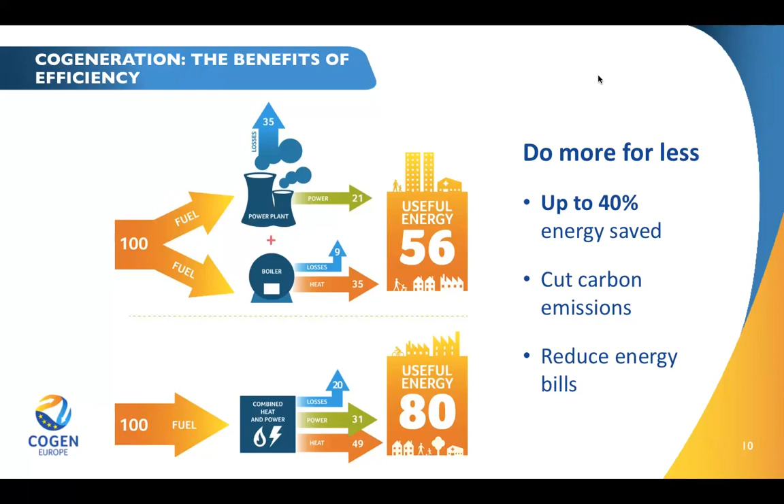So as it's being said, CHP cogeneration today is at the absolute core of the new system that we are aiming at, because it enables us to link both electricity and heat as well as gas markets. It definitely improves the overall system efficiency, making it possible to apply the energy first principle across the entire energy

chain. It enables us to minimize waste in all possible forms, being fossil fuels, which obviously will be progressively withdrawn from the new distributed, modern and digitalized system. And it will enable us to integrate such valuable resources as biomethane, hydrogen, and biomass, as well as boosting flexibility by supplying dispatchable power. It will lower the overall energy system costs and bring, above all, value to local level and local communities, new consumers, and potentially create new jobs locally.

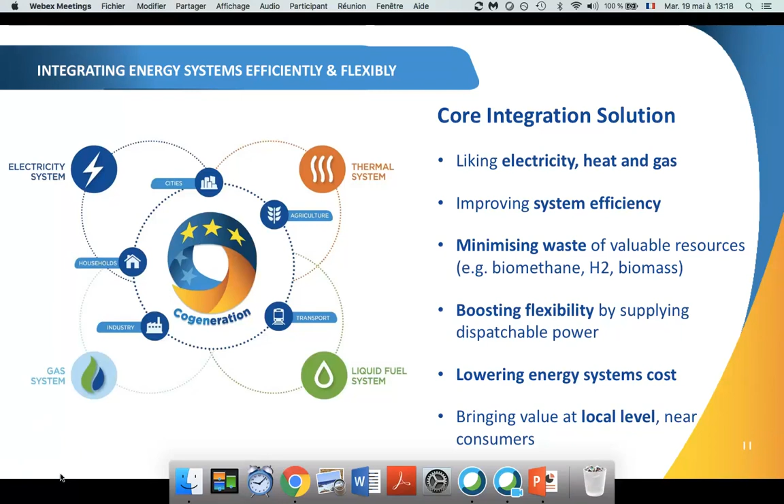Yes, so this is just a summary to show you how cogeneration can be part of the new system and why it should find its righteous place in the new context of the new sector strategy. And I will leave the floor to our two presenters to show how practically this can be achieved.

Thank you, Camilla. So now we're going to hear a few interesting stories to illustrate sectoral integration. The first will be the KIEL project. So I have Klaus Parhuber from INNIO Jenbacher, and he will give the first presentation.

I see you there, Klaus. Thank you very much, Hans. You can see my screen, yeah? Not yet. Not yet? There's always a slight lag. Now it should work. Yes. Thank you, Klaus. The floor is yours.

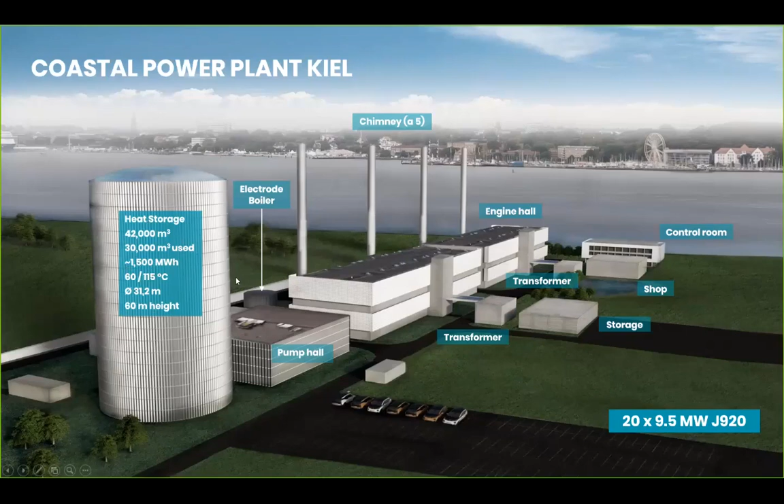This is a picture that was taken end of 2019, right at the time when the plant went into commercial operation. You see here the big heat storage that is just in front of the old coal plant that is here behind it. And on the next, on the left hand side, you see the old coal plant, which was built 50 years ago. It was built really for not flexible operation. Typically such coal power plants have been built for 1 start per year. They shut it down just for some maintenance. The coal plant was also a little bit bigger, about 300 megawatt electric output and about 300 megawatt heat output.

When running in combined heat and power, this plant had, of course, more than 50% total efficiency, but not achieving a fuel utilization and total efficiency of more than 90%, as the new plant is doing. As I said, the new plant is consisting of 20 gas engines, producing in total 190 megawatt electric output and about 192 megawatt thermal output. On this picture, you see the old coal plant here behind the new engine plant. And really the difference is the flexible operation of the new gas-fired engine plants, which can start up in 5 minutes and can ramp down to 4 megawatts. Everything between 4 megawatt and 190 megawatt is possible.

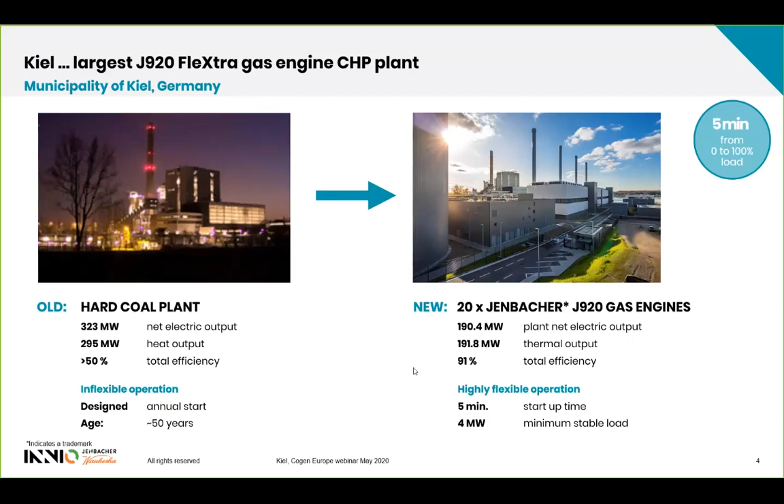On the next slide, again, this is a project that is a coal to gas switch, and it is a CHP plant. And in Germany, there are good CHP incentives, and about 5 years ago, the government started providing additional incentives if the customer is switching from a coal to a gas plant. And this makes this project attractive in terms of economics. On the other side, it was a big investment. It was a 290 million euros total investment. It's not only the engine plant. The 290 million has also the pump hall included, the large heat storage, the power to heat module, as I said before, and all the infrastructure around the engine plant.

And the customer did go for project finance, and the biggest portion of financing is coming from the European Investment Bank with 105 million euros. And this was possible because this plant is eligible for EIB financing, meeting the EIB lending criteria. Just recently, end of last year, EIB revised their lending criteria and reduced the threshold.

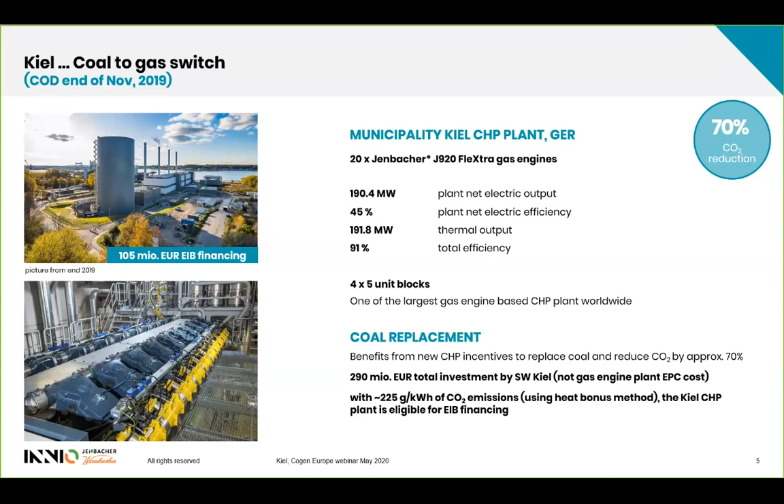The total heat that is provided per year is about 1 terawatt hour, and the peak load is 500 megawatts. But this is just on very cold days. The CHP plant can provide close to 200 megawatt thermal output, 192, and the peak load is then done by the smaller CHP plants as well as by the peaking boilers, which run just a couple hours per year. And as I said, the main customers are 73,000 households in the city.

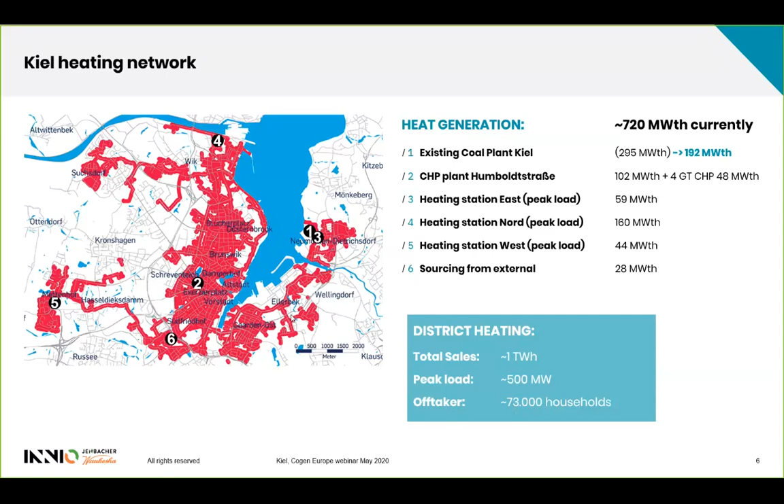And there's also supply from the network to the plant, especially to the electrical boiler in times of oversupply of electricity, when the renewables are producing a lot of electricity. Then there's the heat storage that is just in between the engine plant and the heat off-taker. And of course, there's a local electricity supply to the electric consumers in the city.

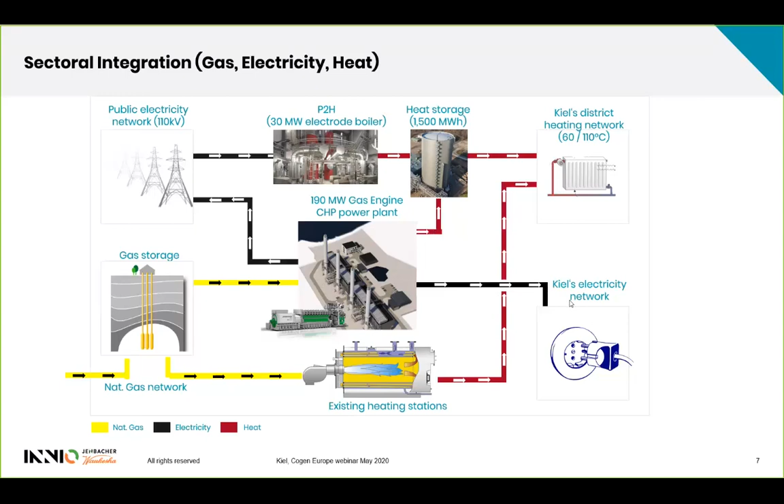How does it work? We have decided between two cases, a high wind and a low wind case. At the high wind case, the electricity on the grid is provided mainly by renewables, a lot of wind in the north of Germany, and at this time the engines are not running. Electricity is coming from the grid, and heat generation can be done by the power to heat module.

If the prices for electricity are really low and it is attractive to run the power to heat module, this can be turned on, and then they produce green heat out of renewable electricity. And in general, the heat is provided by the heat storage because the engines are not running. In case of low winds, the engines are running, electricity and heat are provided by the engines, and the heat storage gets filled up.

All that is to ensure a stable and reliable heat and electricity supply to the customers of the Stadtwerke Kiel. Of course, heat can go up and down. There is a daily load curve on electricity, and there is a difference between winter and summer. But all that demand, heat and electricity, must be guaranteed at any time by the Stadtwerke. And the flexible operation of the plant ensures this, and they can run this plant under the best economical conditions.

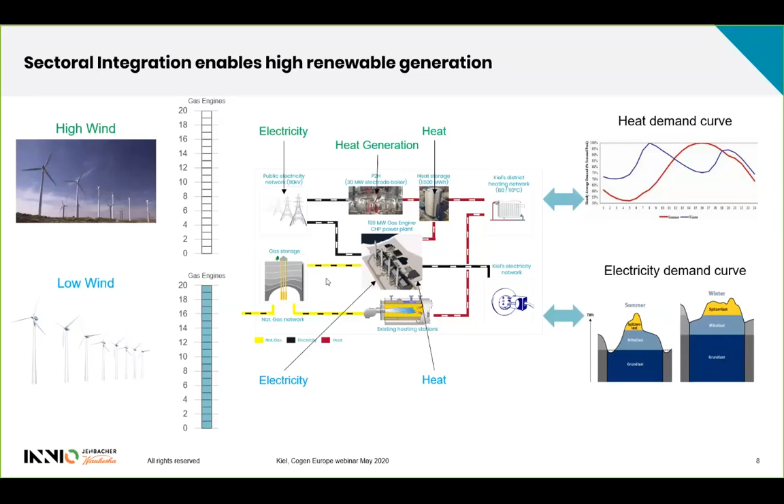It's always constant at 45% electrical efficiency and 91% of fuel utilization rate, 91% total efficiency. And the engines that are not running can be brought back online within 5 minutes. This short startup time, fast response, can typically be provided only by plants that are running at spinning reserve. This plant can do it with non-spinning reserve.

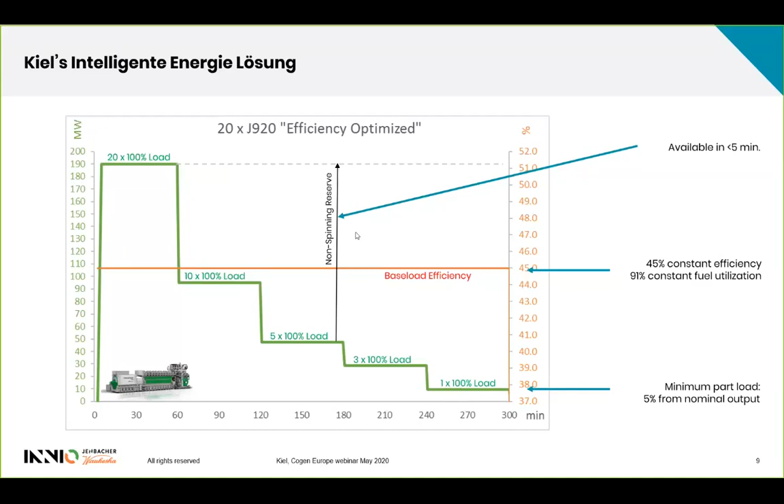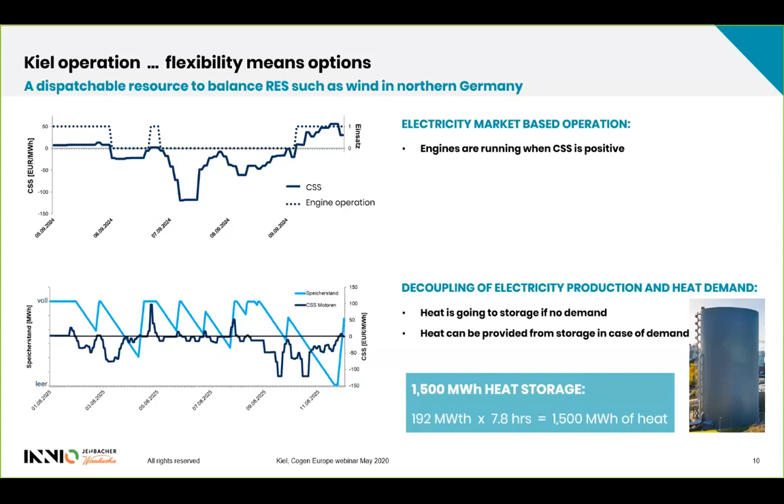And we said before, the heat storage has a capacity of 1,500 megawatt hours. Just to bring this into perspective, what does it mean? If you run the plant at full load, producing 190 megawatt thermal, you need about 8 hours to fill up the heat storage. And the other way, you can provide heat at full load, full capacity, over about 8 hours out of the heat storage. So the heat storage is a very critical element in the flexible operation of the plant.

And the result was that this plant is designed for flexible operation, and all the engines could see up to 800 starts per year, sometimes starting 3 to 4 times a day.

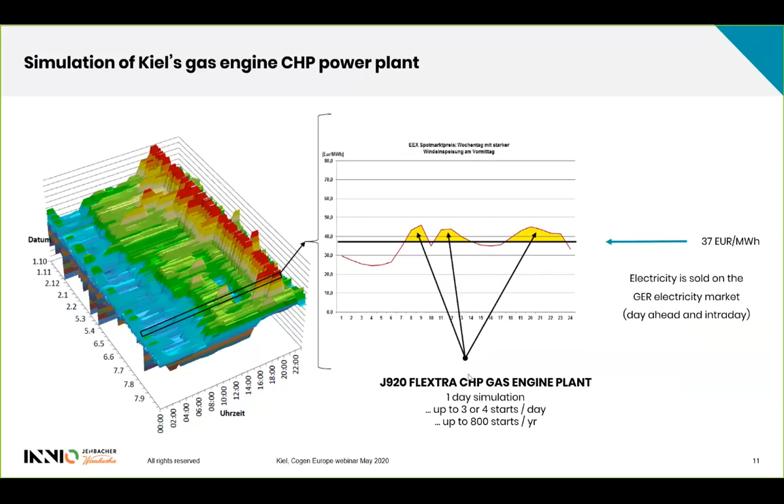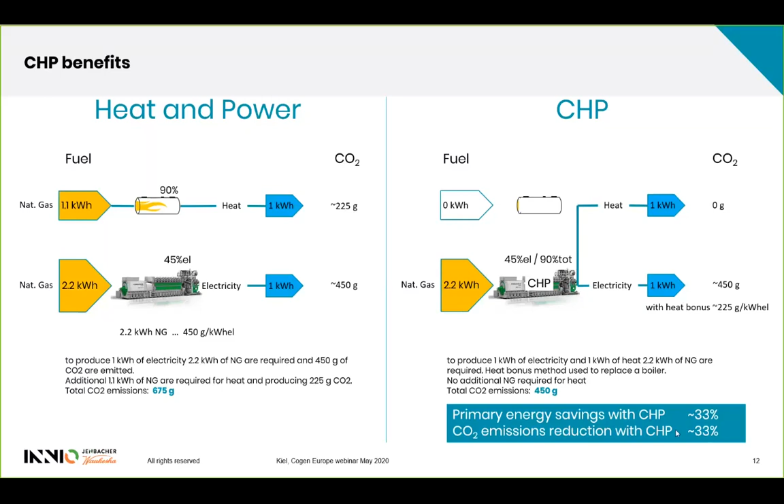And very often in Europe, we're using the heat bonus method. This allows us to reduce the specific CO2 emissions from a gas plant from 450 to 225 grams per kilowatt hour. That's how we calculate the CO2 emissions. And with that, we are well below the 250 grams, that is the limit for EIB financing. And as I said before, we achieved 33% primary energy saving, at the same time 33% CO2 savings.

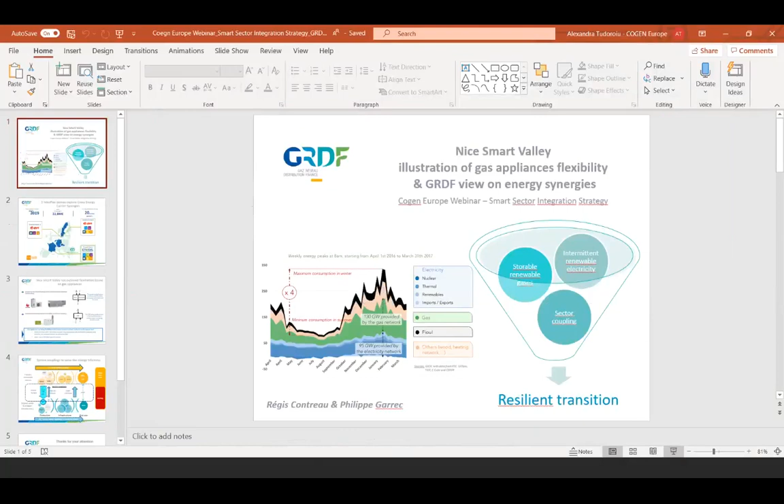Regis and I are very pleased to present you today our Interflex field study on sector coupling with smart appliances. Transition to climate neutrality is deeply changing the world of energy. The challenge we are facing is to solve the world energy dilemma: how to achieve at the same time energy sustainability, energy safety, and energy affordability for all. Wind and solar electricity are good promises for low cost and abundant renewable energy. The drawbacks are that they are climate-dependent, intermittent sources, and that electricity is the hardest form of energy to store and transport. This is all the more crucial in the prospect of electrifying seasonal demand such as heating.

To give you an illustration, you can see on the graph here the energy demand in France between summer and winter. The ratio is 1 to 4. One idea to solve this difficulty is through power to gas, a way to take advantage of the existing large gas storage infrastructure. Another one is to use gas grids as a backup at the end user's level through appliances such as mini or micro cogeneration or hybrid heat pumps. That's what we have tested in the Interflex experimentation, which Regis is going to tell you about.

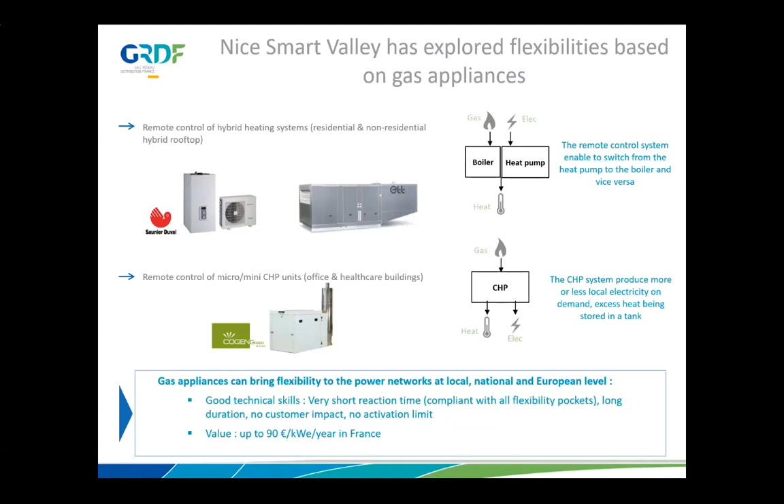So, as Regis just showed you, Interflex gave us evidence that smart sector coupling at users level is already a technical reality. At GRDF, we strongly believe that coupling of electricity and gas in one energy system at both production and users level is the most sustainable, safe, fast, and cost-effective way to climate neutrality. So, this is a slide where I try to sum up the interest of coupling.

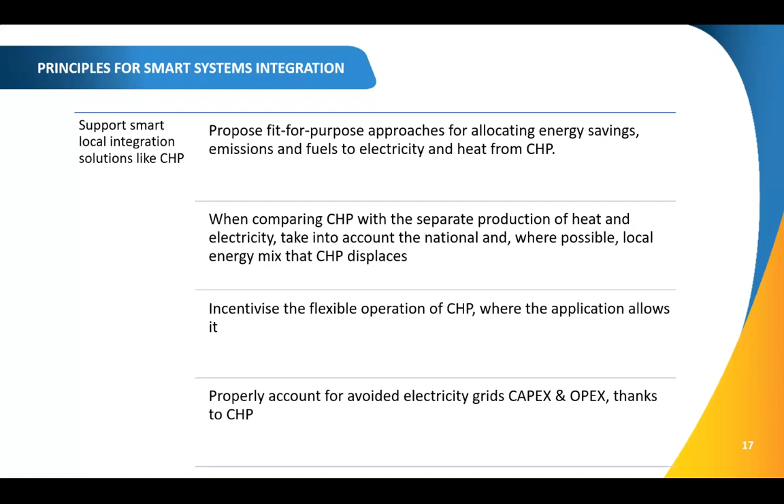We do need to find ways of incentivizing flexible CHP and maybe promote a higher flexibility of some CHP systems when the applications allow it. And we also need to properly account for the avoided electricity grid costs thanks to CHP, and that will ensure that CHP can play its role as an integration solution. That's all from our side.